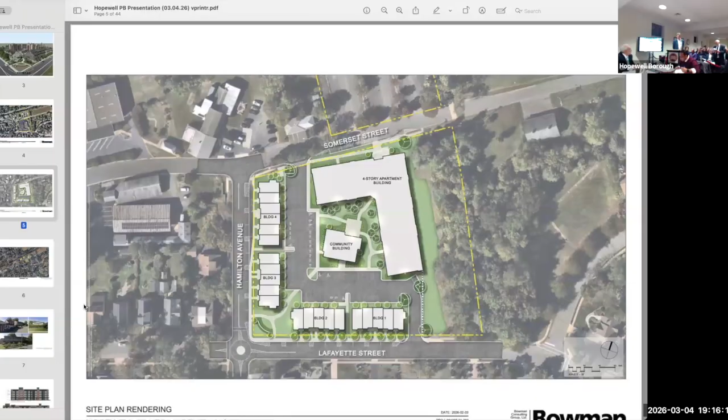Would you like to give the board the benefit of your professional qualifications? Yes, I graduated with a Bachelor's of Architecture degree from Rhode Island School of Design in 1981. I've been a registered architect for 40 years. I'm National Council of Architectural Registration Board certified, a member of the AIA, licensed in New Jersey, New York, and Pennsylvania, and I've been principal and president at Kautter and Kelley Architects for 32 years.

Have you been accepted as an architect by other boards in the state of New Jersey? In New Jersey, no, first time. Okay, well he's licensed in New Jersey, and your license is current, correct? All right, we will accept this applicant.

Okay, okay. I'm going to let you walk the board and the public through your presentation, and I'll have questions if I have them. All right, thank you.

All right, so I'm here to give a presentation that specifically responds to chapter 12 of the zoning code, section 12-24.6, and other provisions and requirements pertinent to this development and design project.

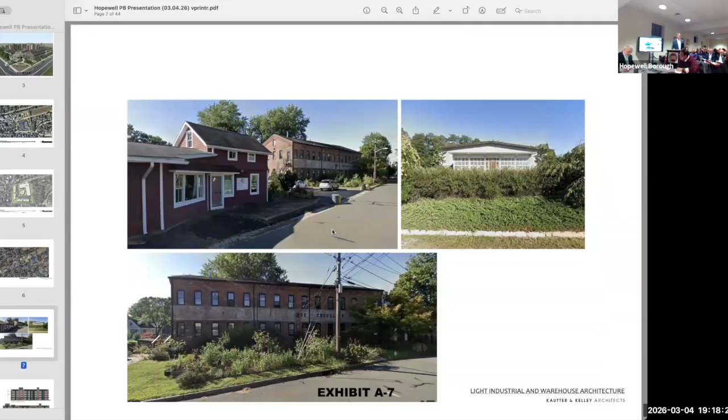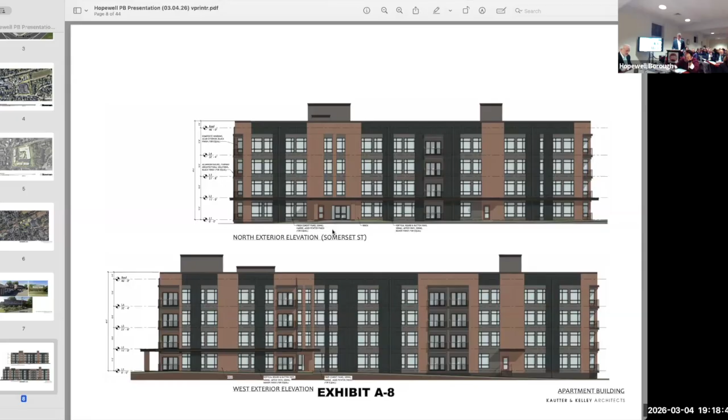The four-story apartment building design and detail considerations were informed by Railroad Place's early to mid-20th century light industrial and warehouse architecture, massing, and materiality. Design was improved through review with the Hopewell Historic Preservation Commission. The design includes 8-inch recessed, large-scale windows, fenestrations 4 feet 6 inches to 5 feet 6 inches wide by 7 feet 4 inches tall. The majority of apartments incorporate balconies with painted metal rails. There's a total of 78 apartment units in the L-shaped 4-story building.

On exhibit A9 — let's go through the exhibit numbers for the record. A7 is a photo board. A8 is the apartment building north and west exterior elevation. A9 is an aerial image of the neighborhood historic context. A10, which hasn't been shown yet, is another photo board of arts and crafts and bungalow style architecture. Now you can refer to these.

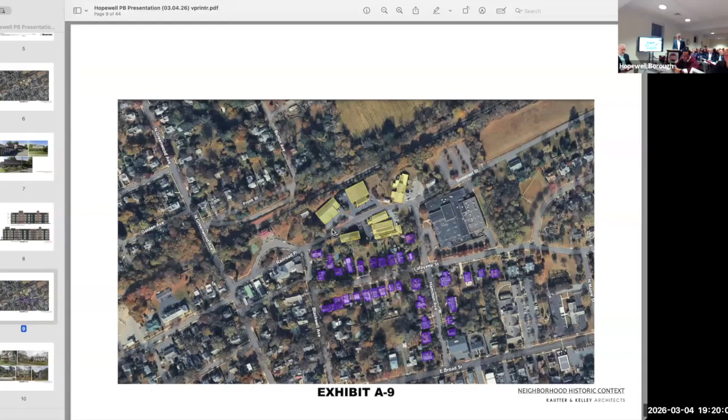The design incorporates front porch entrances, a mix of clapboard siding and shingles, extended roof eaves, rooftop dormers, fenestration rhythms, and single-family residential scale relationships. There are 42 units in the townhouse design.

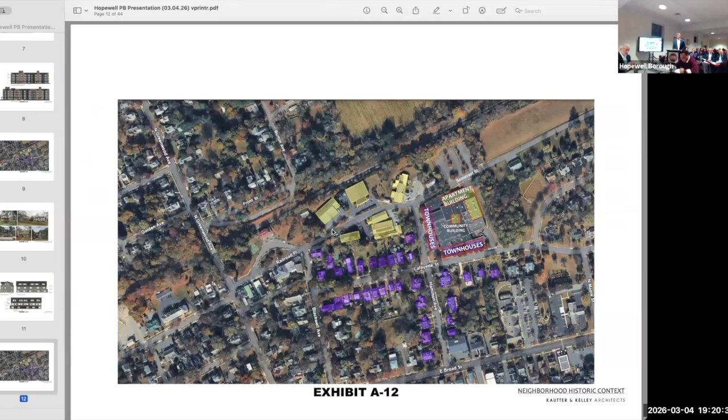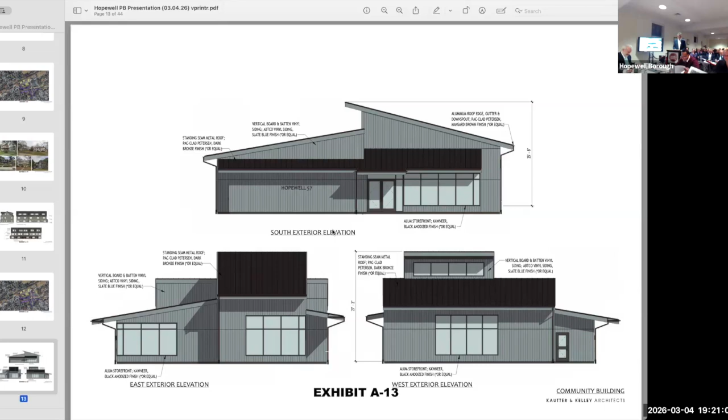The designs conform to building maximum dimension criteria, as indicated on exhibit A14, the floor plan of the four-story apartment building. These are two typical floor plans, the first and second floor. You can see on the floor plans that we have vertical stair circulation at either end of the two wings, an elevator lobby, and the shaft in the middle of the building.

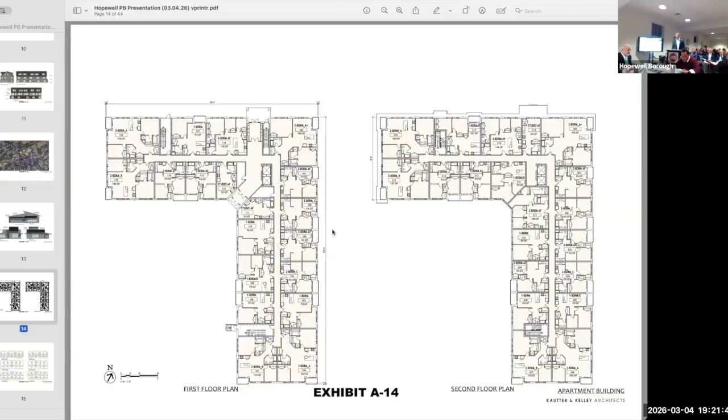The apartment building is 225 feet on its longest dimension, with other facade lengths of 183 feet and 70 feet. A15, the next exhibit, shows plans of the stacked townhouses: one 12-unit building is 124 feet long by a depth of 42 feet, and three 10-unit buildings are 104 feet long by 42 feet. The one-story community building has a footprint of 72 feet by 53 feet.

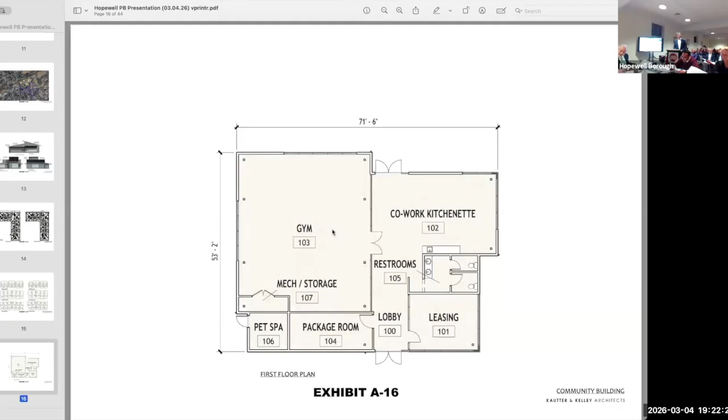Regarding applied methods for variations in setbacks, materials, and colors, as shown on A17, the architecture of the four-story apartment building is defined by an L-shaped floor plan and is articulated with cantilevered roof projections, undulating semi-recessed balconies, and the modulation of brick, masonry, board and batten vertical siding, and fiber cement panel surface textures and colors. On A18, the siding colors include terracotta colored brick, pewter panels, dark gray vertical siding, and dark bronze gutters and downspouts.

Moving on to exhibit A19, the 2.5-story stacked townhouses utilize a mix of varied building massing with 15-foot wide pass-through openings and an open corner plaza at Lafayette Street and Hamilton Avenue. The street fronts of buildings shift front to back with 2-foot changes in depth at 20-foot wide single units and 40-foot wide double unit areas.

Exhibit A20 shows each building features entry porch projections.

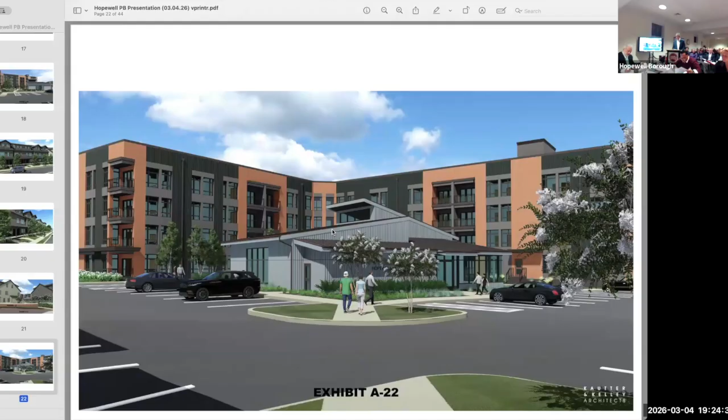Exhibit A23, facade colors incorporate slate blue siding, dark bronze standing seam metal roofs, and dark bronze gutters and downspouts.

Exhibit A24, regarding flat roofs, the four-story apartment building has a 1/4 inch per foot flat roof design that incorporates visually screened rooftop-mounted mechanical equipment. The building's perimeter facades incorporate a continuous parapet with a height of 3 feet 6 inches minimum from the roof surface to the parapet coping.

The roof is accessible via 2 internally positioned stair towers and 1 centrally located elevator tower with 2 elevators. The roof has a dedicated passive seating, 3,900 square foot roof deck area for tenants.

That's identified in the beige, in the central portion of the roof, with access to the stairs and the elevator, including an elevator lobby and bathrooms adjacent to the elevators.

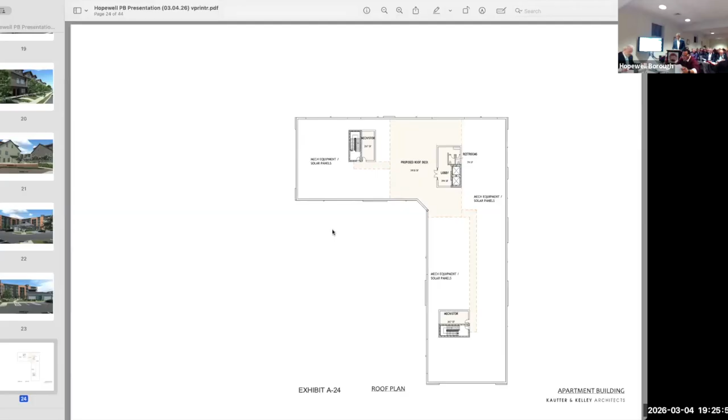Rooftop lighting will utilize shielded light fixtures and are dark sky compliant. Regarding HVAC and mechanical equipment, all equipment is screened from pedestrian view.

The architectural styles, as previously noted, incorporate stylistic features, scale, and massing relationships, and construction detail elements found in the residential and industrial neighborhood context.

The townhouse designs provide visual screening between Lafayette Street and Hamilton Avenue to the large scale structure of the apartments beyond. The apartment building entrances are located off of Somerset Street and within the private courtyard defined by the community building. The community building is designed and sited in a manner that provides a transition of scale from the 4-story apartment building to the backyards of the 2.5-story townhouses.

Regarding future solar considerations, each of the building designs incorporates spare electrical conduit to support the possible future installation of solar electrical systems.

Regarding building placement, the townhouses located along Lafayette Street and Hamilton Avenue are 2.5 stories with a total height of 36 feet 6 inches and are designed to be complementary to the residential architecture.

The 4-story apartment building is situated along Somerset Street and the rear eastern property line of Block 18, Lot 1, which limits its scale impact on the development of the property as a whole.

The 4-story apartment total building height is 49 feet 6 inches. The community building height is 27 feet to the high point of the roof.

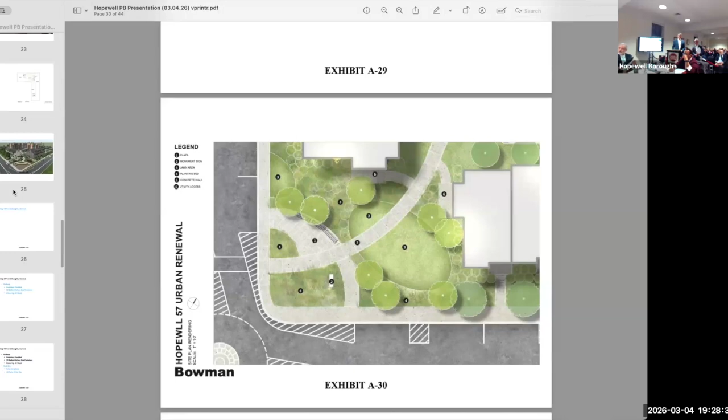I believe that the courtyard in front, on the corner of Lafayette and Hamilton, has been changed. Is that correct? Yes, I can address that. I was going to present that a little later on, but yes. I wanted to take that big sign out of the discussion. It's not gone, it's just not part of our proposal. That was all I was trying to do.

You gave the height of the 4-story building and the community center. What's the height at the peak of the townhouses? 36 feet 6 inches.

I haven't seen it yet, but do you have a perspective of standing on Hamilton or standing on Lafayette and looking up, seeing how those 4-story buildings appear? I'm just trying to get a perspective. This is a bird's eye view and I can see them.

Go back. Let's go back a couple of slides. I think this one gives you an idea right there. No, keep going, hold it, you're going the wrong direction.

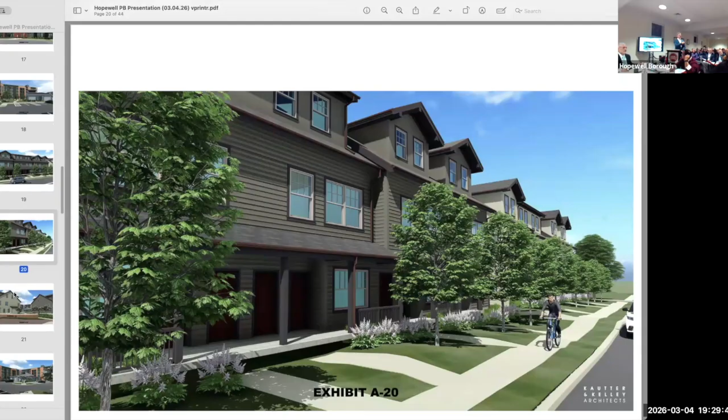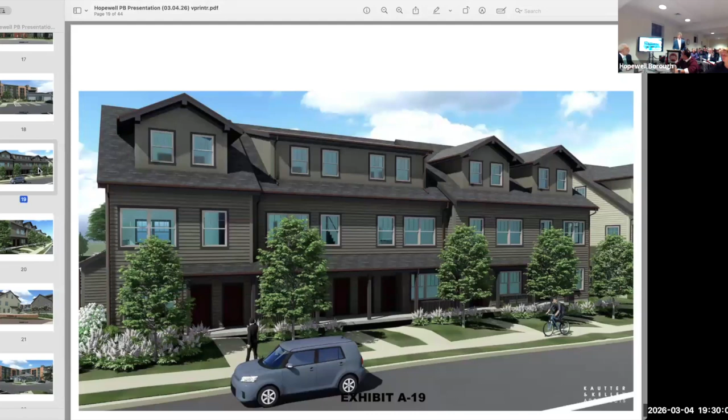This one right here, Micah, is what I think he's asking about. I think what they're asking for is a view standing across the street on Lafayette or Hamilton, looking at the townhouses. This is across the street, looking at the townhouses, so you can see that the apartments are completely obliterated by the 2.5-story townhouses, except at the corner where there's an opening.

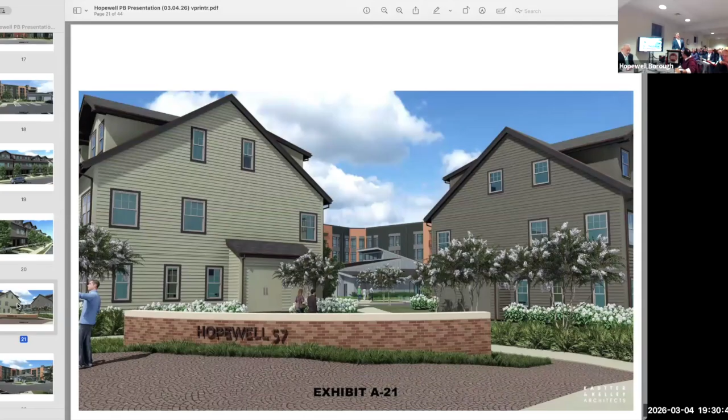I think this is answering your question about what it looks like from across the street, in front of a townhouse. If you're turning the corner at Lafayette and Hamilton, where there's a break between the townhouses, you can see into the community building and catch a glimpse of part of the 4-story building. Actually, you're really just seeing the 4th floor of the 4-story apartment building in the back.

Can you identify, I'm looking at this one, you said all mechanical HVAC is hidden, but it looks like on the ones on the 4-story, I can't see it, is there mechanical? These two towers that you see on this rendering are the stair towers meeting the roof. There are mechanical spaces next to them that are completely enclosed.

Do you have on your plan where all the mechanicals are going? No, not yet, we do not. We know that they're going on the roof and we know that we're going to screen them. I pointed out, I don't know what this is, I'm going to say this is probably very close to 3 feet 6 inches, and the parapet around the entirety of the building is this height. So within that is where the mechanical equipment located on the roof would also have screening in front of it. So that parapet is at 49 feet from the ground.

Is the parapet 49 feet from the ground, or the top of the elevator shafts 49 feet from the ground? The top. That's a good question, do you know, Carl? Of the building itself, it's the roof elevation, the high point of the roof elevation. The parapet is an additional 3 feet 6 inches above that.

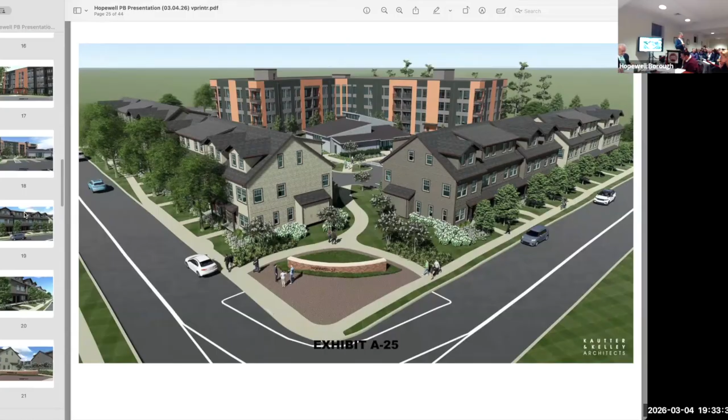Maybe. Okay, can we just answer your question a little bit better, possibly - I'm going off recollection, I wasn't looking at the screen for one of the exhibits. Mike, if you could back up to the entrance elevation on Somerset, where the perspective is taken from the other side of Somerset looking at the building. This is a 3-dimensional model, so those stair towers, the elevator towers, everything we've been talking about is modeled into this. They're far enough back from the edge of the roof that you're not going to see any of that stuff.

Exhibit 17, A17. Except the parapet, you will see. This is a 3-dimensional model, and we could get you other views if it would satisfy the board to do that. But I can assure you, the parapet, the orange there, from the ground to the top, is not 49 feet, right? That's the 52 feet. Okay, now I understand the ordinance says roof height.

I understand that. Did you have a question? No, that was it. Okay, any other questions up here? Comments? Okay, with that, I'm going to open the floor to the public.

You'll need to come up. Oh, sorry, I was going to say, because the architecture relates to historic preservation, did you want to hear from Michael? Sorry about that. Yes, you're right. Michael, I think you're up. We're going to hear from historic preservation. Oh, yep, there he is, okay. And then after, come on, Mike.

Oh, good, it came up. And Michael, you're here in your capacity. I'm good. Yeah, Michael Mills is gonna present his report from the Historic Commission, and then after that, you'll have the ability to ask the architect any question related to his testimony. Do I need to be sworn first? Yes, you do. You swear to affirm tell the truth? I swear I will do so. Thank you. So Michael, you have to speak up because the people in the back need to be able to hear you too. Okay, for my back turn. Anyway,

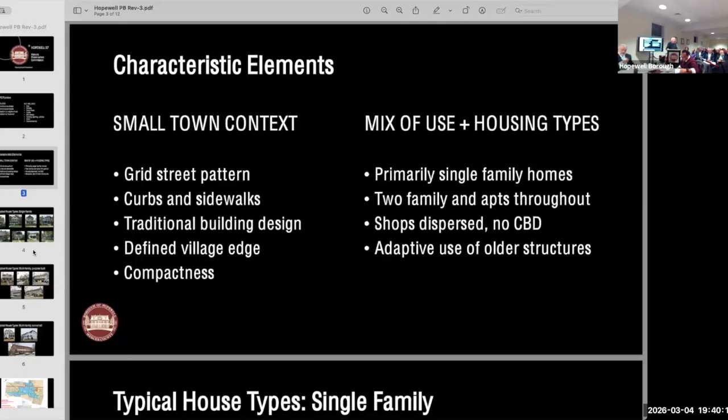So the first thing we talked to their team about was characteristic elements in Hopewell Borough. It's a small town with a grid street pattern, curbs and sidewalks, and traditional building designs. It has a defined edge and is compact. It's a mix of primarily single-family homes, two-family houses, and apartments. Shops are dispersed throughout the borough, and there's been a tradition of adaptive use of older structures.

Next, please. So these are the types of buildings typical of the borough. Hopewell has been described as a town of front porches. On almost all streets, there's some sort of gesture to the street with a front porch over the front door, even in the bungalows, some small gesture of a porch. In Hopewell, they tend to be sitting porches—people sit on the porch and watch the world go by, drinking a cup of coffee or doing what they're doing. That's part of the design character, and you see that on Lafayette and on Hamilton.

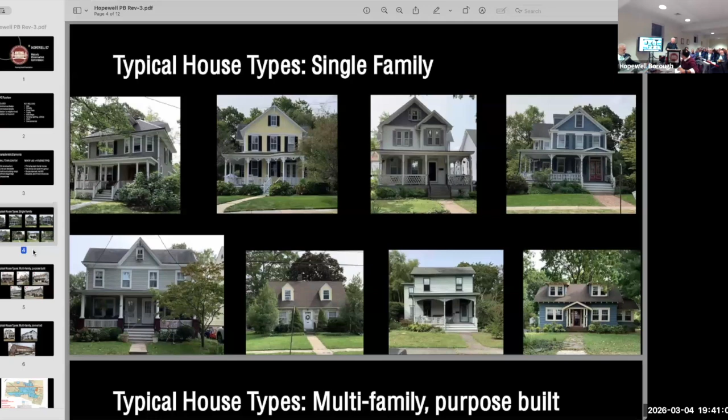Next, please. As for multifamily, some are purpose-built, some are adaptive uses of older buildings. For example, on number 4, on Railroad Place, we think that was a former railroad station for the Mercer and Somerset line that was converted to a house later.

Number 2 is immediately across the street from this proposed development. And we talk about that a lot in terms of porches.

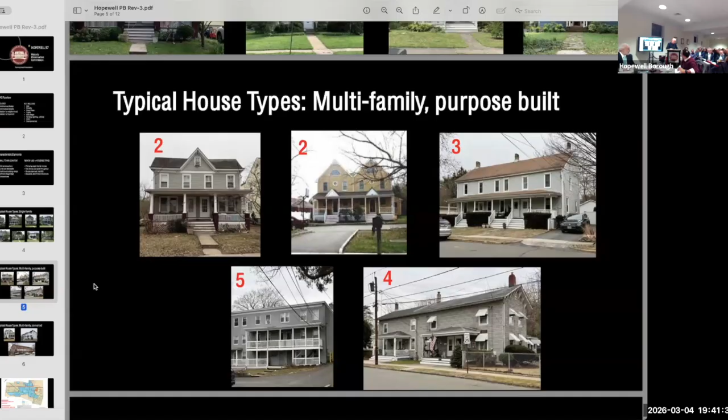This is the industrial context for light industrial that was referred to earlier, the chocolate factory. Actually, the building in the upper right was a former school on Model Avenue. And then there's a multifamily on Broad Street on the corner of Broad and Blackwell that's rather grand. So there's all these different types of multifamily situations.

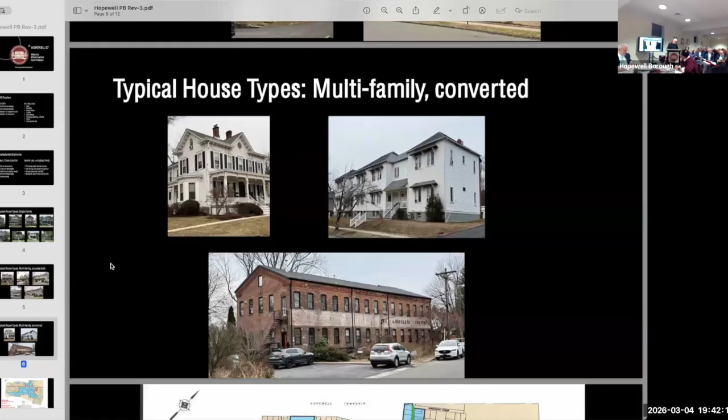This shows the site in relation to the Hopewell Historic District, which is in blue, and the site is in orange. You see it's in the buffer zone, which is on the edge of the historic district.

Our purview as historic preservation is to discuss general design characteristics of new buildings in the buffer zone. And so our purview is somewhat limited. I thought it was important to make that point.

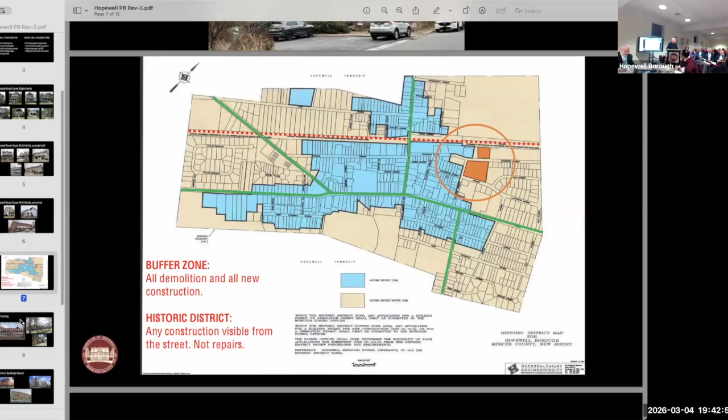We looked at row housing because at one point the houses were not split up the way they are now. The one example on the left there is Roebling, which is a historic National Register historic district. The one on the upper right is in Princeton on Harrison Street. And I believe the one on the lower right is in Cambridge. But you see a lot of brick, a lot of individual units. And again, 2.5 stories is the predominant theme.

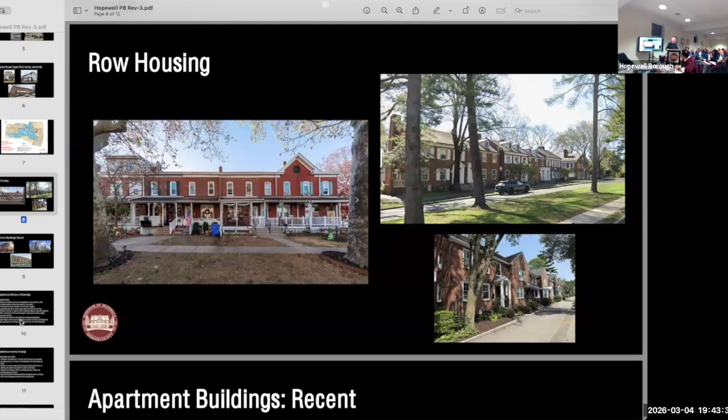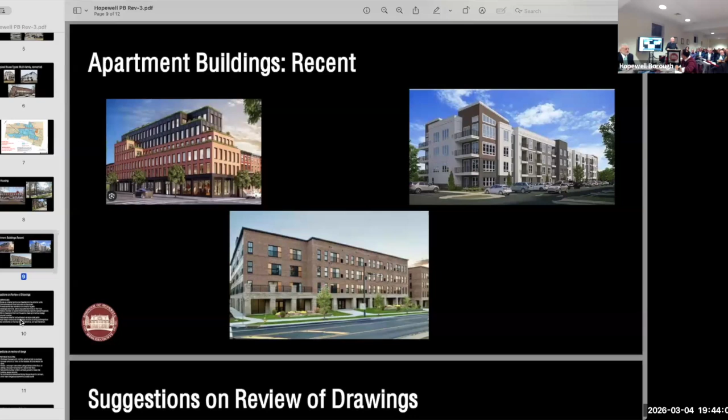We also looked at apartment buildings for precedence, for context. And many of them in urban areas and villages are brick. So here's a couple of 4-story brick apartment buildings. I think the one on the upper right is being built right now next to the Princeton Shopping Center. You can see that. So that gives a sense of the scale of things.

On the townhouses, we worked with Jeffrey and his team to break up the continuous facades into shorter units for scale. Eliminated second floor balconies on the street. Provided some rear entries on the interior facade. We suggested using single dormers rather than sheds on the front, although we sort of compromised on that, and ended up with single windows and a few shed dormers, but not many. There are shed dormers further down the street that are existing on Lafayette.

We asked that he reduce the number of triple windows, and he took them out basically completely on the front, on the street sides. There are a few still left on the interior elevations, and those can't be seen from the street, and we were fine with that.

We suggested mirroring the townhouse facades to make a symmetrical design around the center. They felt that the irregular townhouse layout was more appropriate, and we ended up compromising on that and agreeing that would be fine.

We asked for a special detail at the end units, and they have provided a large cross gable dormer. The key thing we think were the porches.

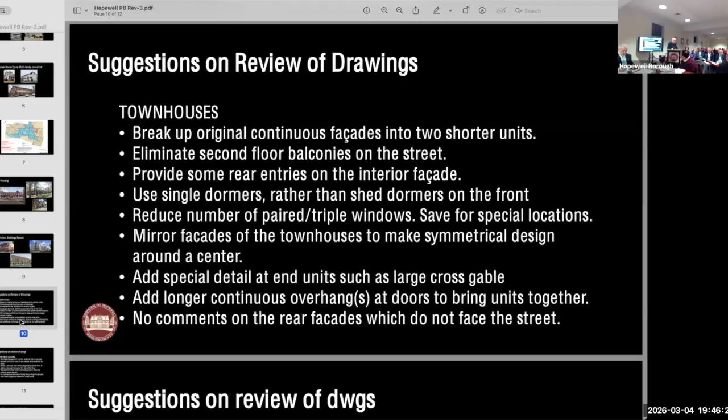On the apartment building, you haven't seen the earlier designs, but the team was treating this as sort of an industrial building that was converted to housing. And in that regard, they suggested a sawtooth roof on Railroad Place, which usually has skylights behind them and ventilation. But there was nothing behind these. It was just a parapet.

It was a thin parapet, which you'd see if you were on Railroad Place on an oblique. You would see that it's basically a Western stage set kind of thing. So we suggested getting rid of it. It was really serving no purpose because their cornice was high enough, and basically it would reduce the perceived height of the building by one full story.

So we thought that was a good thing because we knew there'd be concern about the height of the apartment building. We also suggested creating a stronger base, either by using all brick on the first floor or adding a stronger horizontal line above the first floor. They couldn't do brick over the entire building, but they, as you saw from the renderings, did brick at all the entrance points of the building.

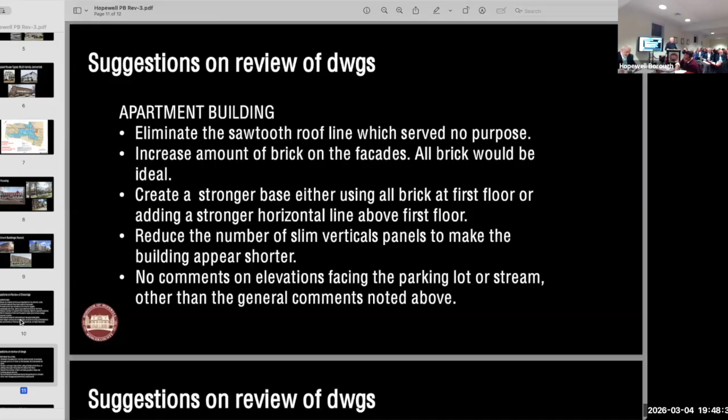Ground to roof, which we thought was a very good concession and broke the building up in a better way. And they did add a continuous line in metal, like a fascia, at the first floor level, which gives a more horizontal appearance and brings the scale down somewhat. We had no comments on the elevations facing the parking lot or the stream, other than the general comments noted above.

So that's about it. Is there another slide? That's it. That's it? Okay.

There are no variances being sought in this application, of which we are aware. With the recommendations and conditions that we've already made a matter of record, and that Jeffrey has incorporated into the design, the HPC recommends approval and the issuance of a certificate of appropriateness for this project. And in conclusion, we would be delighted to have this deteriorated building, which is on the site and has become an eyesore and an environmental and safety hazard, replaced with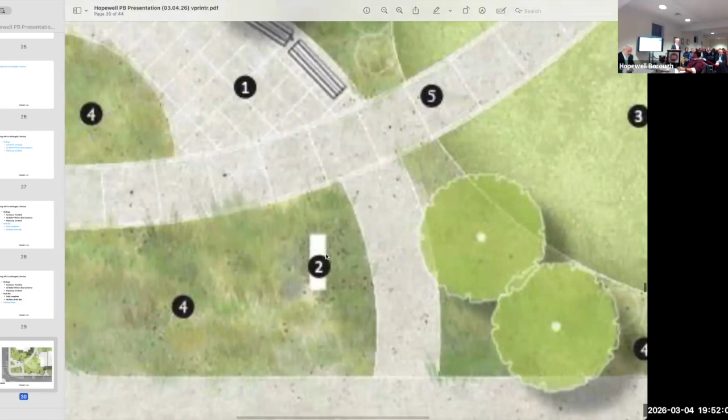So let's just mark this into evidence, that's A30. Yes, we kind of skipped from A25, which was the last one that we did. Yeah, we're out of order because we thought he was going to present this later. Gotcha. Okay, you know what, because it's on it, we'll mark it as A30, but I'll make note that it was intended to be presented later. Got it, so that's why the numbering is off. But be happy to answer questions about it. We're excited about this, we think it's a far better use of that space, and we hope it meets with your approval.

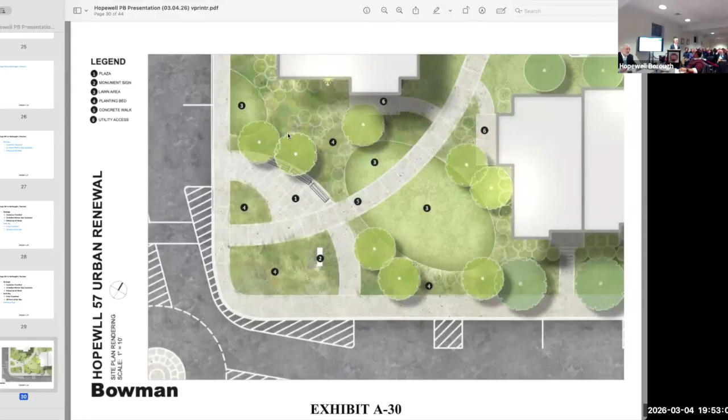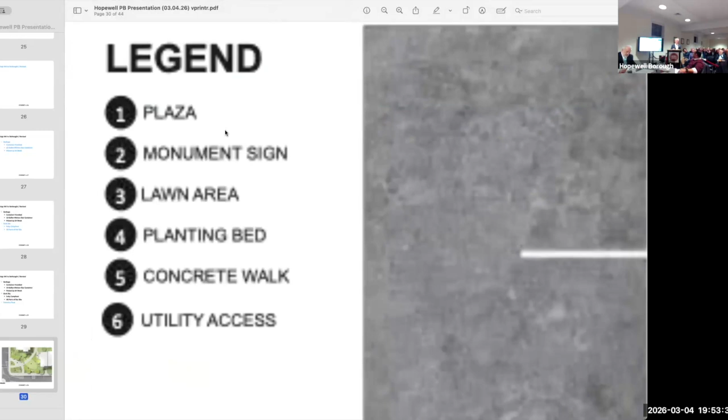Jeffrey, could you go down there's numbers on this plan, correlate with the key, can you just kind of identify what those are? So number 1 is a paved area, excuse me, let me refer to mine. Oh there, thanks, I couldn't see it. Number 1 is a paved area, it's a smaller area, come out for a second. It's the area in front where they're surrounded by benches that are themselves shaded and surrounded by landscaping.

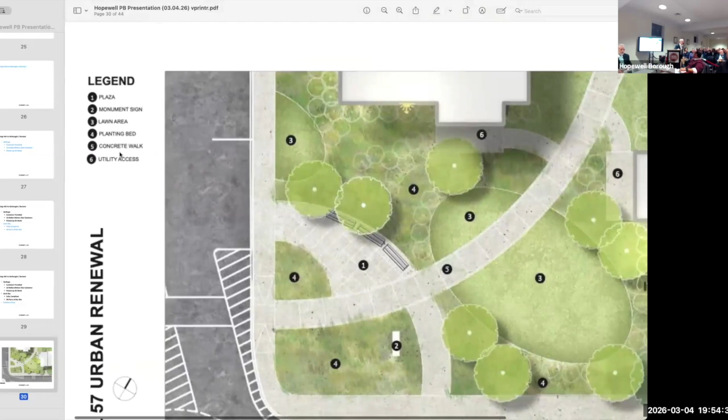Number 2 is the monument sign, that small sign in the front. Number 3 are lawn paneled areas, and they can be for sitting or just greenery. They are on both sides of that entrance. The next number, I believe, are planting beds, low level material that are meant to complement the taller shrubberies and trees that'll surround the lawn panels and the other areas. Five is a concrete walk, which is pretty obvious, and 6 is utility access.

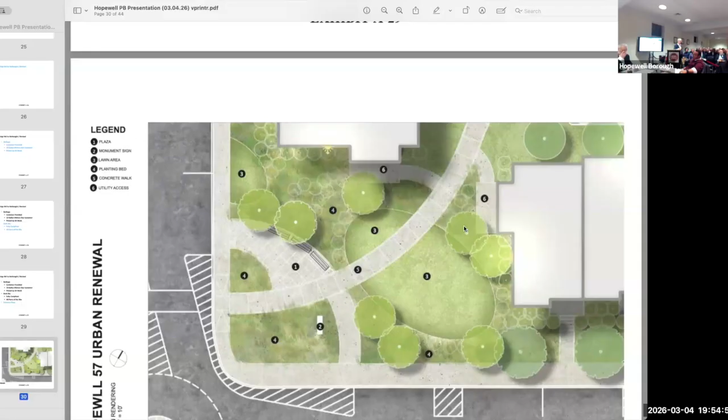At the end of the townhouse buildings, there are utilities that are enclosed within the end of those townhouses. So there needs to be access to those. We can't landscape completely to obscure them, so they do need some access. We've showed that, but that's really de-emphasized by the landscaping that surrounds it.

Great, thank you. Okay, Lou, you had questions? Yeah, I had a question for the architect.

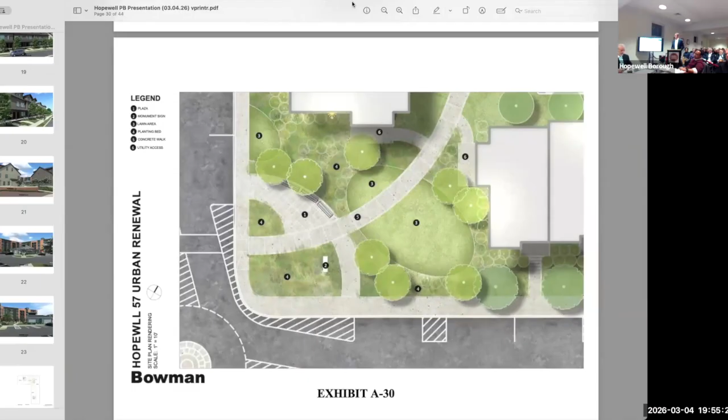Michael mentioned, you started and we asked about the height. Is the base the same for all the buildings? Is it at the same level? You're talking about the elevation. 49 feet above ground, but is the ground higher in the back?

The elevation changes, and the roof height is based on an average where grade and roof occur around it. We followed the letter of zoning in establishing the height of the roof.

I don't think that's what he's asking. I think he's asking what's the level of the base of the townhouses compared to the base of the apartment building. Is the apartment building on higher ground or lower ground? Is that what you were getting at? Correct, yeah.

Mike, yeah, Paul from the back. Paul, do you remember if the grade elevation of the townhouses is higher or lower - I mean, it changes. We really need to look at a site plan. There's an area across the site, and then additional.

Yeah, if we can see it, that's a topographic site plan, I could better explain it. Come up here. Maybe to simplify it, just like the average, as it goes through the general site.

Yeah, the site slopes around the L-shaped floor plan of the four-story apartment building. It changes from a high point on the east to a low point on the west. That sound right?

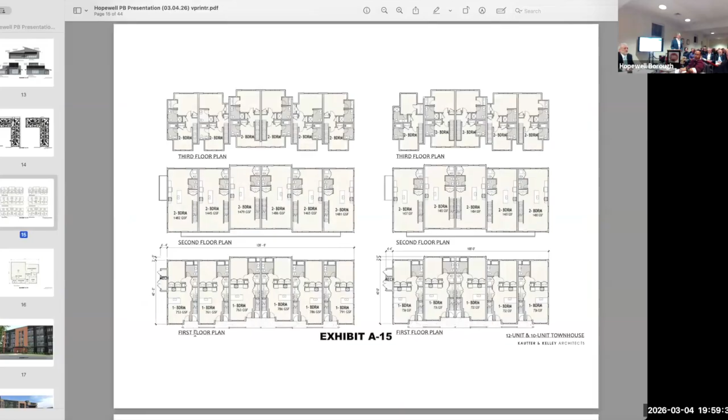I'm just hoping there's enough room for chairs. Is there room between the doors? Yes, so that distance - each door is 3 feet, so each one of those 90-degree swings you see on an entrance door is a 3-foot wide opening, to give you a sense of scale.

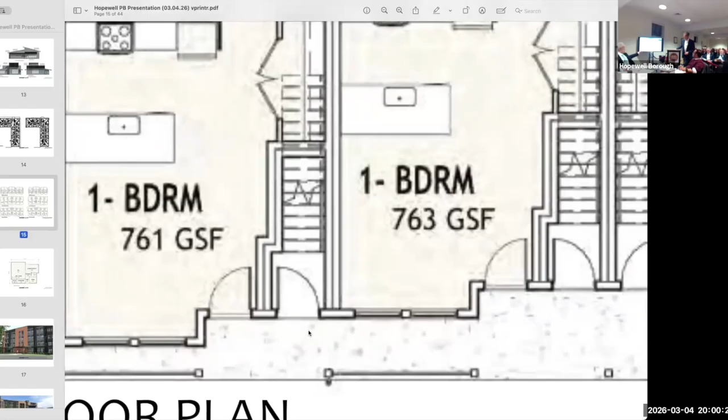It's a 3-foot wide opening, but it looks like it's less than 3 feet. This distance right here would be somewhere in the neighborhood of 5 to 6 feet. This distance right here across the entrance is about 9.5 feet left to right.

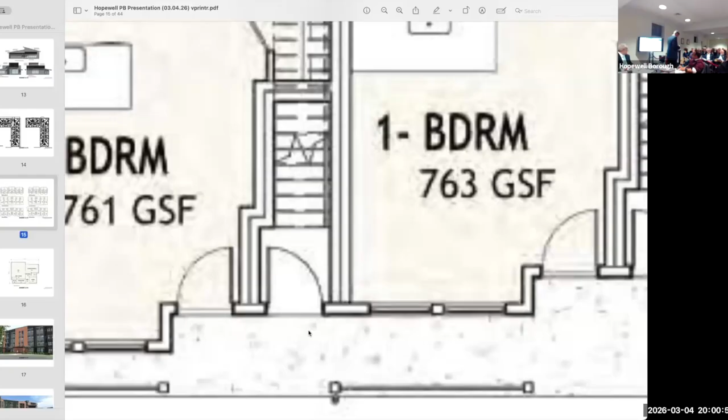From door to door, and then you have this large area that I'm looking at. The width of that is about 4 feet. The width of this is again about 9 to 10 feet, with the depth about 5 to 6 feet, somewhere in there.

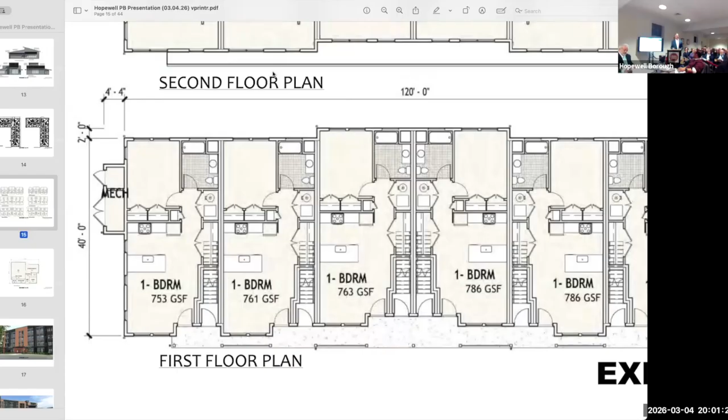A typical balcony on an apartment is going to be 5 feet deep. So the balconies up on our 4-story are 5 feet deep from the rail, okay, that was my next question. All right, thanks.

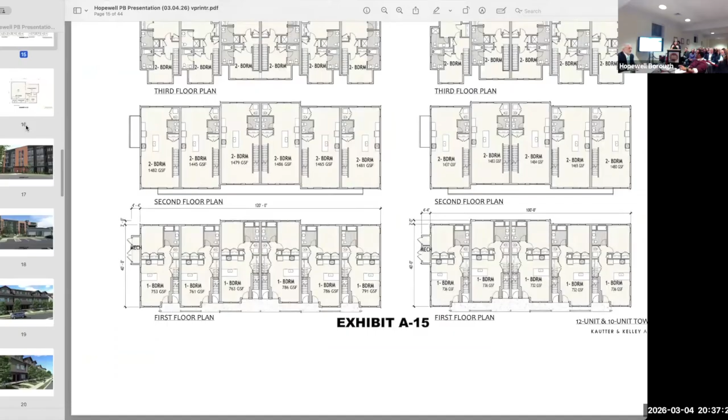Can you put up the townhouses? I am trying so hard to stay on top of this, and I feel like every time I go to our website, it's a different image of the townhouses. What was published on our website yesterday looked very different than what's here now. So one question I have is, are you all just seeing this now for the first time? Yeah, because this is totally different.

It's the same—actually not, because if you go to the Hopewell Borough website and click to find the planning redevelopment, that is not what is being presented. It's probably the same material. Follow me, this is a finer rendering, more higher resolution. The other one, which we were asked to put up right away last time, is more of an outline, but the architecture is the same. It's identical, it comes from the exact same place.

Okay, so I'm sharing with you that our borough published this yesterday—this is what you need to rely on, not this. This is what we're presenting. So my question to the planning board is, is this the first time you're seeing this? And Brad is saying yes.

So I'm just not sure what the process is. I didn't know if the process was that you all get it a little bit before, so you have a chance to review and study it, or if you're like, surprise, now it looks like something else.

This is the first time that we've seen this detail. Is that what you're asking? Yeah, it is, because I'm trying to do my best to be educated, so I don't understand the process—if you're expected to be seeing this for the first time and be asking your smart questions and understanding your concerns about it. I didn't understand that you're not seeing this 24 hours before, 48 hours before.

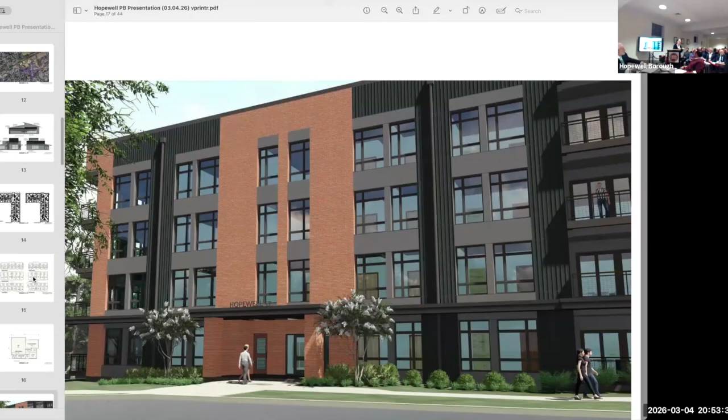So will there be anything done to mitigate, to offer privacy for those people living in those apartments, and also to provide window treatment for those people to be shielded? We provide shades in every apartment and every window. Thank you, thank you.

Okay, so I have one question, four questions. Nobody has said anything about handicap accessibility. Did you testify? I did not hear his testimony. Were you here last time? No, I was not. Okay, where can I access that?

If you have a specific question, just give me a second. Are you doing all the responses today? The entirety of the four-story apartment building is completely handicap accessible. But not the townhouses? The entirety of the development - the percentages of required ADA compliance occur within the apartment house.

And what about the surrounding areas, the parking? The parking facilities - as I testified in the prior hearing, yes, we have the required number of handicap accessible parking spaces, and accessible routes from those spaces to the building. We provide that. Okay, and will you be doing a 3D rendering?

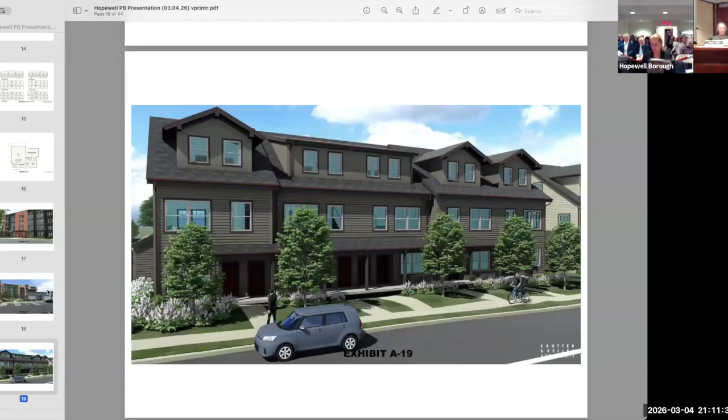Definitely zoom it in, I'm old enough to be blind right now. So hot. Okay, I literally can't read that. Oh, it's in front of you too. It's on that. Yeah, that's not gonna help. Okay, so is that a lobby? We can tell you what it says. With a proposed roof deck and restrooms? Yeah, I'll scroll through it.

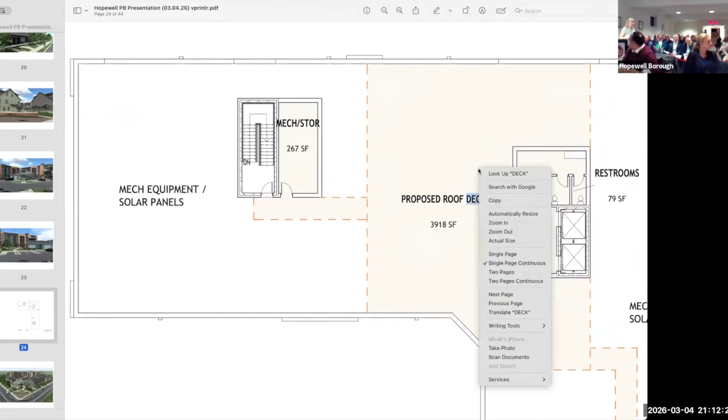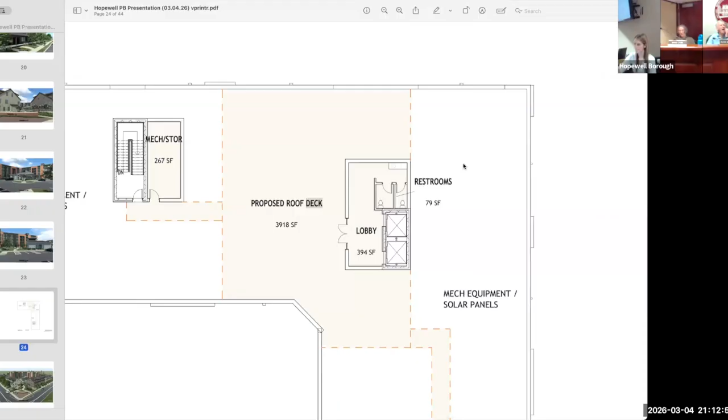Okay, ready? So there's one of the stair towers and a mechanical room adjacent to it, fully enclosed. There's a deck path from the stair to the proposed roof deck area, which is soft seating for outdoor seating for tenants. Where is that on the roof of the building, is that facing the street? We're in the middle of the building, at the inside corner of the L. That's Somerset up here, and this is the courtyard and the community buildings over here. This is the wooded area.

Can you give me some clarity, is that a lobby? It's an indoor space for the elevator to open out into, to get you out onto the outdoor proposed deck. So this implies that we're adding a level of occupied space existing on top of the 4th story. The 4th floor is living space, it's apartments, there's no occupied space on the roof.

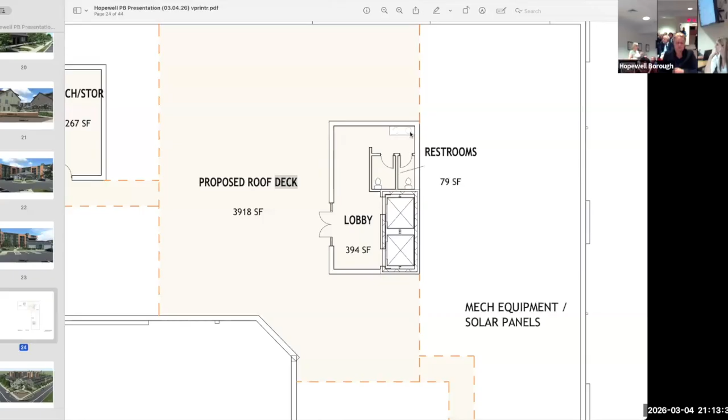But people are gonna be using it. They're allowed to, by zoning, by right, we're allowed to have a roof deck. That was in the ordinance, allowed for social space on the roof. Honestly, I don't think it's addressed specifically in the zoning, I think what's being referred to is that by building code, we're permitted to do it. We'd like to have a passive seating area up there if possible.

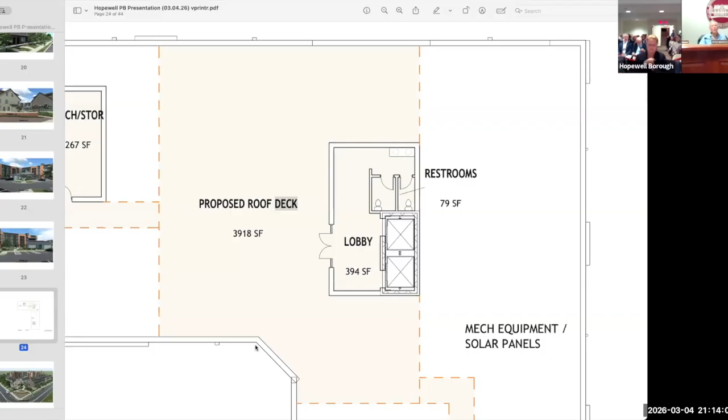Because you stated that you think families aren't the most likely tenants who are gonna be moving in, and if the most likely tenants are young professionals, I'm wondering what we think the social space on the roof is going to look like. Not really a question. We are gonna deal with that moving forward, just so you know. Okay, I understand your concern.

We are going to deal with just a follow-up question. A little bit of a hypothetical, but if this wasn't there, would we need stair towers if we weren't using the roof for any purpose? The answer is yes, we would still need stair towers of that magnitude, as opposed to just a crawl-up access ladder, because there are going to be mechanicals on the roof that need to be accessed. The roof itself needs access, so yes, the stair towers have to access the roof, and the stair tower has to be how you access it.

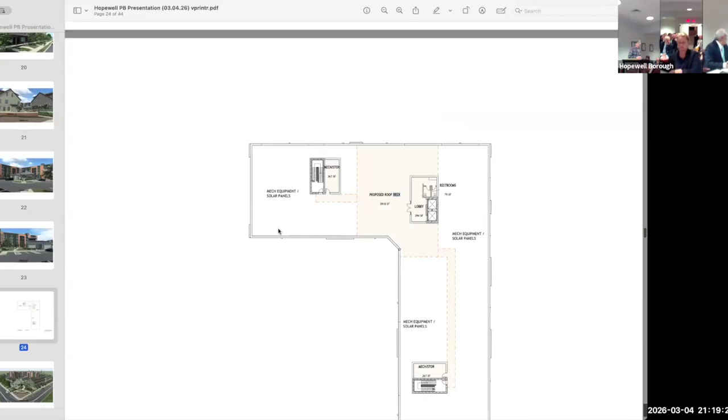For the architect: I think he said the parking for the townhouses would be on Lafayette, is that correct? No, he didn't, that was testimony of the engineer, and we have completed that questioning. My question, I think it was exhibit 17, the picture of the townhouses on Lafayette, yeah, I think it was 17. No, that's your part, I meant the townhouses.

I know you said there's 19 units, there's 2.5 stories. Is each story going to be a separate unit for a separate family? Units are on the first floor and second and third floor. So each floor would have a different unit? No, no, no, let me explain. There is a 1-story 1-bedroom on the ground floor, and above that, a 2-story 2-bedroom just above it. So each one will have 2 units, but not 1 unit on each floor, correct.

I know you said you could not see the apartment building from Lafayette. Is there somewhere you could see it on Somerset Street? How far up Somerset Street would you have to go before you could see it?

Don't know the answer to that. What's that for, the architect? We obligated ourselves to study it. He doesn't know as we stand here today, but I don't think he does. Can you answer that? How far on Somerset would you have to go to see it?

You will see the entirety of the 4-story apartment building from Somerset Street, since it sits on that street. From Hamilton, you will not see the building because the 2.5-story townhouse will be in your way, blocking your view for all of Hamilton, except for the openings, the 15-foot openings between the buildings.

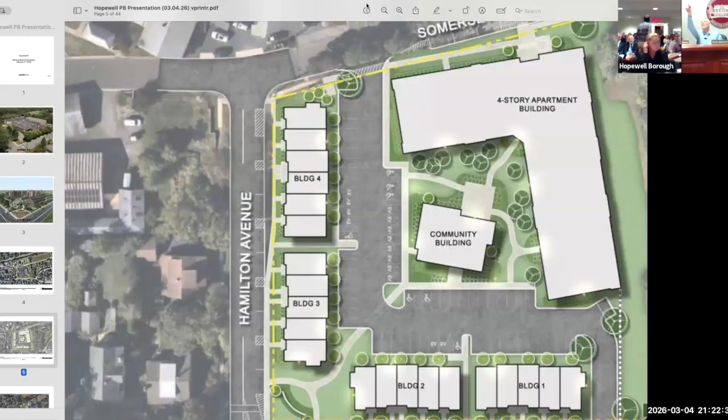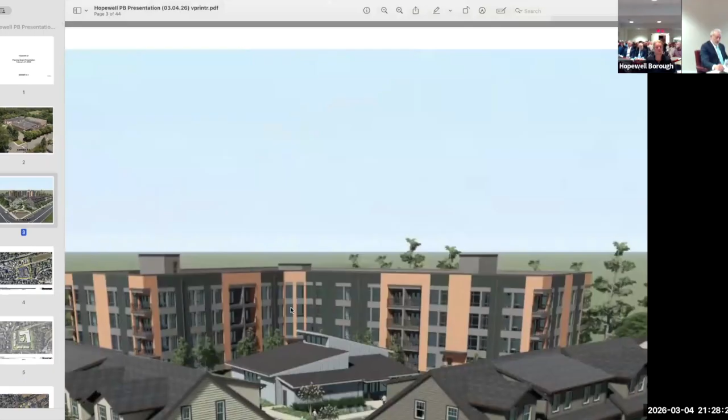Well, that doesn't represent the 4x8 modular brick. Where the orange areas are, understand that the renderings that came out of my office were not this orange. This is something that's happened through the regeneration of good images, and I know that's what you'd like to see. That's why I said the color of the brick would likely more resemble the color of the burgundy that you see on the Borough of Hopewell logo. Correct, but we're still saying it would more resemble something not that, and kind of like that.

And I'm asking a question about the type of brick and when we see the brick. What's very interesting, let me just say this. Take a look at the corner here. On this monitor, it shows up a little bit red. This one seems more orange. I'm just saying that there's a difference there as well, visually.

Okay, and another question is how big is the little sign gonna be out front now? Well, it has to be limited to no more than 35 square feet, and it's likely to be smaller than that. Yeah, it will be smaller.

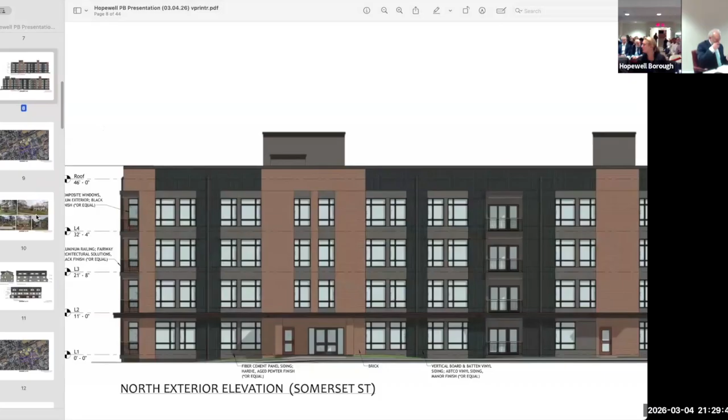And then Leslie, could you pull up the picture of the deck, the front deck that you were talking about? The porches, yeah, the porches with the spaces for the tables and chairs. I didn't know anyone mentioned tables. You did. I didn't hear it. Okay.

Now, you pointed, for my clarification, I'm not sure if I'm reading it right, where you're showing that area that's 6 foot. My question is, in front of those doors, you're showing that 6 foot out to the rail, correct? Now, aren't they two entrances into two separate units? So you can't put anything there, that's not a usable space, because you have two doors next to each other.

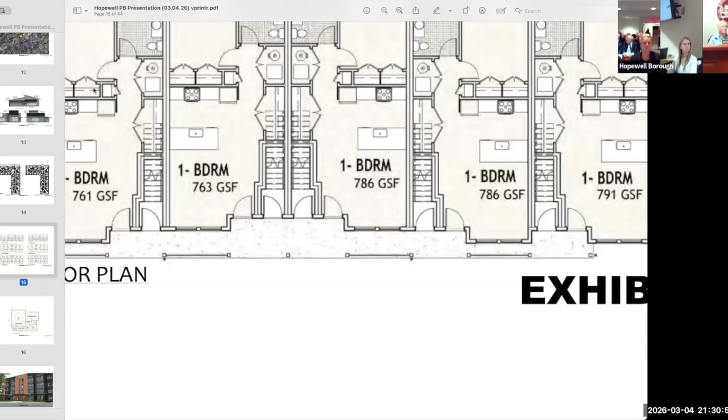Yeah, I didn't indicate that that would be a place for chairs. Well, in a discussion that somebody brought up, it was said that's big enough for chairs. No, you said that. No, what I clarified was the space between the doors affords area for a table and a chair, and I didn't say table, I said chair. He said between the doors, yeah, and that was because someone on the board had asked about room for chairs. Right, so he answered that there's room for chairs. There's room for chairs. And what else? Yeah, I can keep to the question.

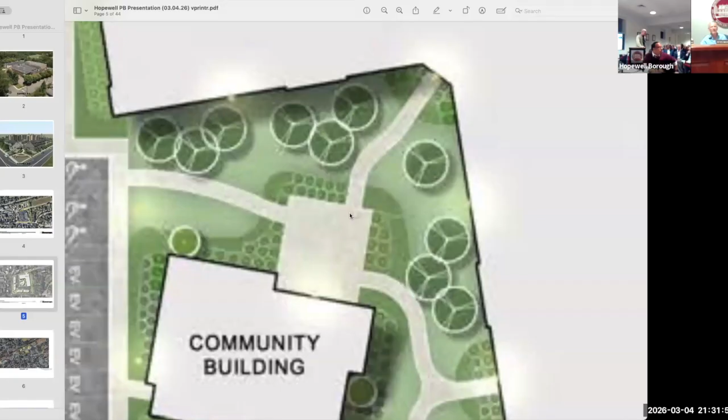So you would eliminate that if needed, and a playground lot could be there for kids? Yeah, but again, we just don't know what is specifically gonna be called for. And all of your units, the apartments and townhouses, are always rental then, you don't sell them? Always rental. Thank you, that's good, thanks.

Who hasn't gone yet? You've both gone, all right. Come on, I got you next.

Community center building - come on up, just say your name again for the record, you're sworn in. Hey Karen, okay thank you. How tall is the community building?

27 feet. So is that 2-3 stories? No, it's a one-story building with a vault at the ceiling. Okay, and then in this picture here, who's got the little pointer?

Is there a green area on the right, behind the building? Yes. Is that where you're gonna be putting the dumpsters? No - we've already dealt with the dumpsters in the lot.

I'm not asking about the dumpsters, I'm asking what they're gonna do with that strip of green. Right now that's a driveway. No, it's not a driveway - a portion of it is a drive from here. This green area is not a drive at all. She's saying it currently is a driveway. Yes, and also the trees are there.

And you're showing some trees - are you actually planning on planting real trees, or are they going to be little landscaping trees? The landscaping was reviewed by the town's shade tree commission - about 5 or 6 people who do this. They came back with a report and told us they think this is appropriate for the site. Okay, I'll review it, thank you.

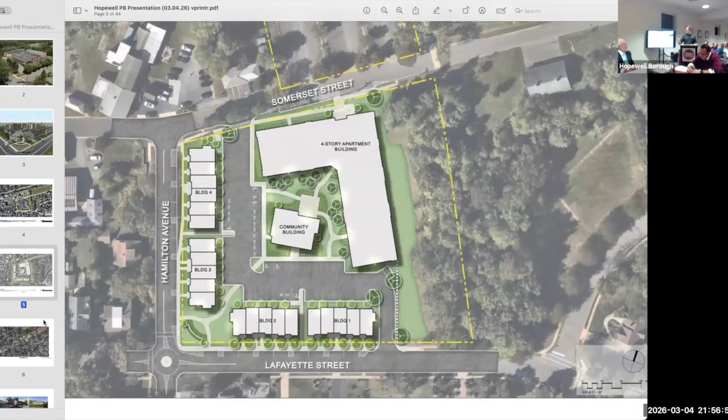Foundation for the document, for example? Yeah, for example, if you're taking a photograph and you're gonna talk about what you see, you have to say, this is a photograph that I took, and make a foundation for that evidence, so it becomes part of the record.

So for a police report, I would say this is a police report, it's from Hopewell Township. If it's a public record, in the public domain, you could bring a copy of it and reference that it is. Okay, and that would be your testimony.

We have one more question unless you're done? Okay, David, and then I'm gonna close it for the evening. We have, well, we still have to talk about continuing. And I do, Carolyn. Real quick. Yep.

It was, schools were spoken about already and discussed the impact on schools, that you'd have 20 kids. No, that's council, that's council, nothing to do with your... nothing to do with us. Yep, okay, that's it.

Carol: I want to comment about a new creative question that was lobbed at us tonight, and I want to say thanks. Marion had left, I believe she's gone. The birds—I think that was a really great question to ask about the birds. I just put up decals on my own doors, and maybe that's something we should pursue. I know we have the Shade Tree Commission, I don't know who would be a part of that, but I think it's important. Okay, thank you.